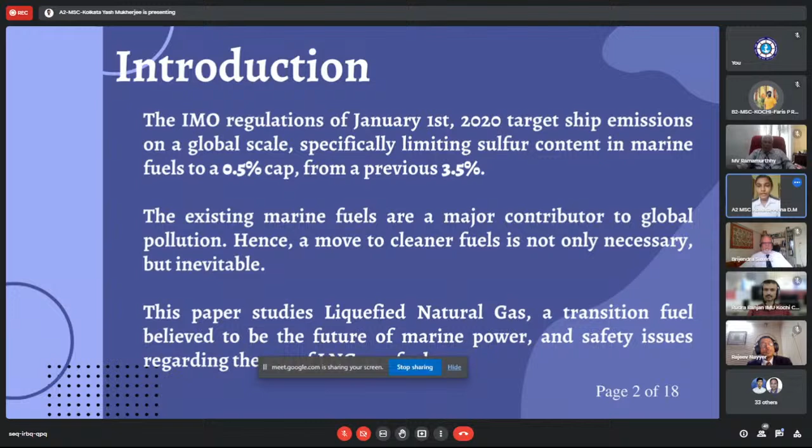Heavy fuel oil has been the main fuel used in the maritime industry for a really long time, as it is the most affordable and accessible fuel. With the rising demand for LNG, we must consider the safety concerns it presents. Our paper looks into these problems and offers suggestions to improve LNG fuel safety.

Our research was conducted mainly based on 3 steps: First, can we really replace HFO with LNG, and if so, why LNG and not any other alternative fuel? Second, if we can replace it with LNG, what can be the safety concerns of doing so? And third, how can we tackle these issues, and how practical are those solutions?

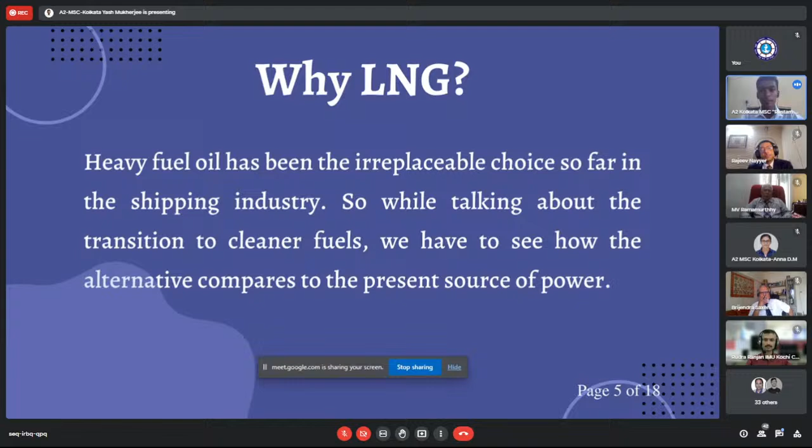Now I request Cadet Rustam Raj to take on the presentation from me. So, why LNG? As we know, after the restrictions on sulfur emissions, mainly in sulfur-controlled areas, HFO is mainly facing many setbacks. As my colleague has already discussed, LNG decreases the emissions of SO2 up to a great extent.

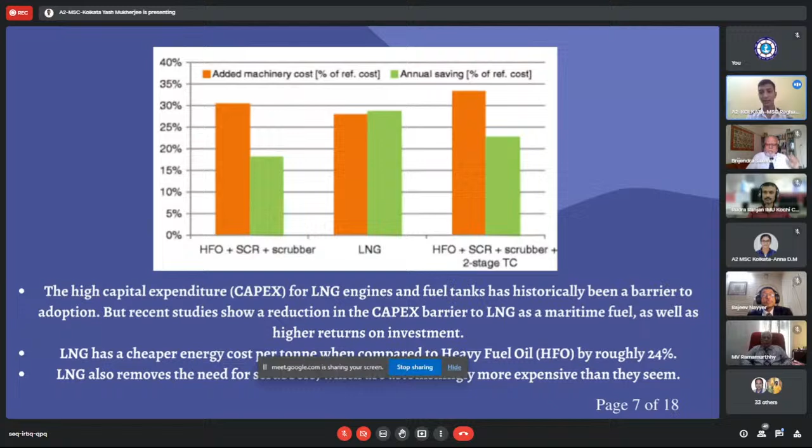Now coming to the cost, LNG as a fuel used to be very expensive long ago, but with newfound sources of LNG worldwide, LNG prices have dropped significantly, whereas HFO prices have risen due to increased use of fossil fuel and lower availability. It is meant to sustain for a long time, but that's not that long. Also, LNG has a cheaper cost per ton compared to HFO. We need less fuel to produce more energy, which ultimately cuts down costs.

So what are the safety concerns regarding use of LNG as a marine fuel? As you know, all good things come with a catch. The first is an inexperienced crew. As it is a relatively newer technology, not many crew are familiar with handling LNG, and it is a very volatile fuel, so you have to handle it properly.

The second is embrittlement due to the gas, which corrodes the metal it is stored in. The third is cold vapor release. In case of an LNG leak, vapors are released and these vapors can explode, which is a huge concern for life and property. And the fourth is leaks during LNG bunkering.

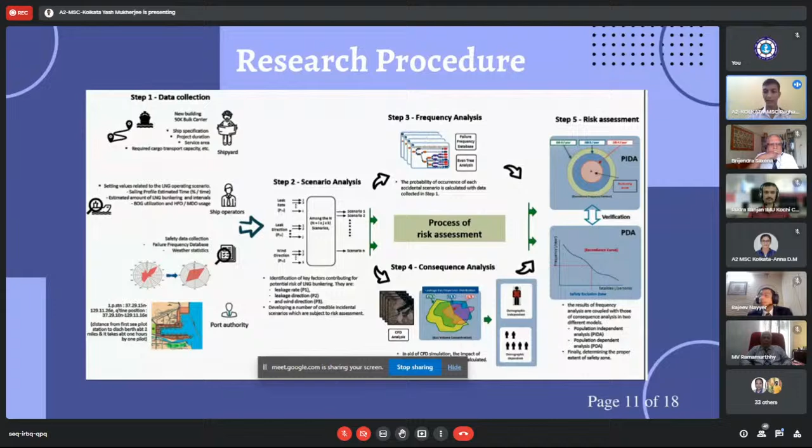The second was scenario analysis. Now we know the contributors which contribute to the accident, which is the leak size, the leak direction, and wind direction. So we combine those to form different scenarios in which accidents can take place.

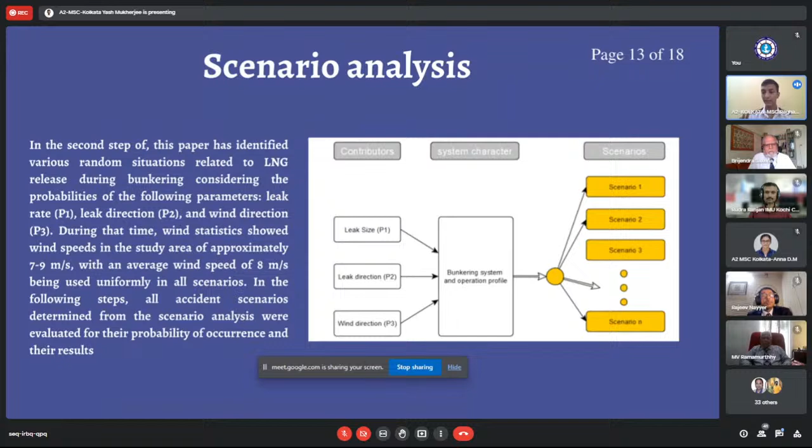The third is frequency analysis. An accident has happened, but how often does it happen? That's how big of a threat it is. So the first is leak hole. We combine three various factors to produce the number of scenarios: first is leak holes, then we combine it with leak direction, and third with wind direction, because the wind direction will determine whether it will go towards the sea or towards the population or equipment, whatever that is.

The next part, which is the most critical part of our paper, is the impact analysis. As you can see the equation on the screen, we use this equation to assess what is the impact of a leak on property and life. Now, the IGF code, which is the International Code of Safety for Ships Using Gases, is implemented by many flag states, but it does not have any specific safety requirements for a safety zone, so we can reduce, minimize, or even eliminate the risk on life.

With this in mind, there are still drawbacks based on the fact that there are different levels of safety requirements set, and not all of them are optimal and ideal. So in this paper, we use two criteria to assess the risks. The first is half LFL, equivalent to 2.5% of airborne gas concentration by volume. The second one is a little extreme, but we have to put in the extreme scenarios: full LFL, equivalent to 5% of airborne gas concentration by volume.

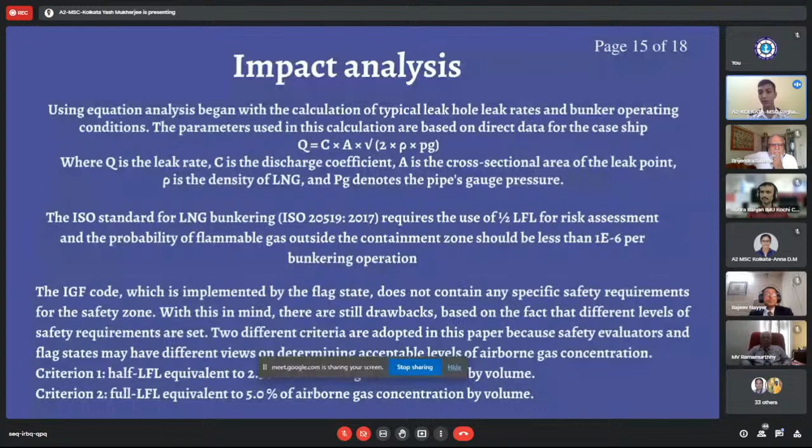The last part of our study was focused on risk assessment. We have all the data, we have combined everything, now we know what are the risks associated with an LNG bunkering accident. It was done in two parts. First was PIDA, population independent analysis: there are no people around, an accident happens, let's see how much damage it creates and what can be put into place to stop that. The second was PDA, population dependent analysis, because PIDA has some pitfalls in determining the appropriate level of safety zones, so we have to put in some people and see how it performs.

So what did we observe? We observed from all our study combined that appropriate levels of safe zones can be set at 28.8 meters, which can greatly reduce the amount of damage to property, as well as focusing mainly on people. Property can come back, people can't. So at the risk of one fatal incident in 10,000 years, a safe zone at 28.8 meters can be set. Whereas at 46.6 meters and 213 meters, the areas are within 5% and higher gas concentration, regarded as the critical zone.

The second part is, in case of critical area considered to be within 2.5% and higher gas concentration in air, the safety zone will expand to 34.9 meters because the gas spreads.

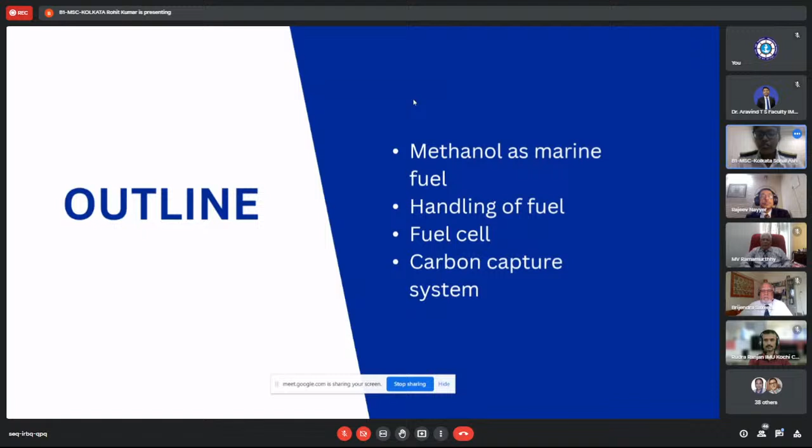Going on to methanol as marine fuel, methanol has emissions that are on par with LNG, but it is far less expensive to modify engines for, and has access to infrastructure because it is currently being used on ships and is supplied by almost 100 ports worldwide. Overall, it is practical in every way and offers a viable alternative fuel at this difficult time in the economy.

When we are talking about the advantages, methanol burns cleanly and releases less smog-causing pollutants and particulate matter when compared to conventional fuels. It can help ships meet eco-friendly fuel standards, improve the quality of the air, and solve related issues with human health.

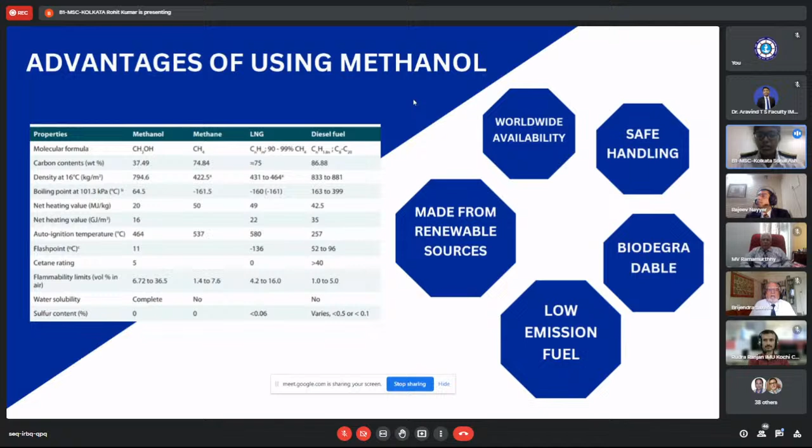When talking about the worldwide availability of methanol, it is one of the top 5 chemical compounds shipped over the world each year. With very minor improvements to terminal infrastructure, it may already be utilized for bunkering worldwide, unlike other alternative fuels. Moreover, methanol has a remarkable history of safe handling, and it is biodegradable.

Handling of fuel: the following instructions must be written on the label of the fuel sample - the receiving vessel's IMO number and name, the bunkering port, sampling technique used, fuel oil quality, and the owner's name and signature. Problems involving adulteration of fuel to increase volume during transportation may be resolved this way.

Although it might be challenging to track the supply chain at each stage, the quality of the fuel can be monitored on a frequent basis as it is moved from one location to another. The majority of issues with the fuel flash point may be addressed by inert gas systems, SOLAS rules, and IMO-approved safety regulations. When debunkering is concerned, it is basically based on the restrictions imposed by states.

Moving on to the next slide of methanol bunkering: as methanol contains no sulfur at all, this whole problem is completely avoided. The toxicity of methanol, along with its low flash point of 11 degrees Celsius, necessitates special management during storage, handling, and usage, in addition to material compatibility concerns. A methanol marine fuel grade definition is currently being developed by ISO, however it is not yet accessible.

Fuel bunkering stations: following are the precautions needed to be taken for fuel bunkering stations. Sufficient ventilation should be provided to the bunkering station. It should be separated from other areas of the ship by a gas-tight bulkhead, and control of bunkering should be done from a safe location where tank level can be monitored.

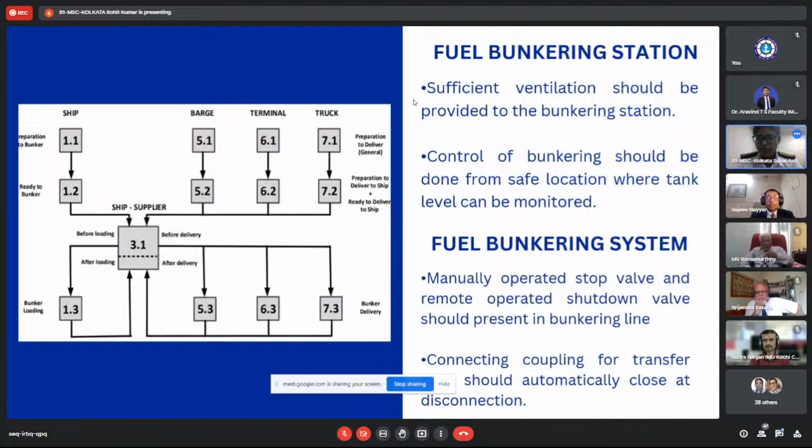When we go to the benefits of using fuel cells: the following benefits can be obtained by using a methanol reformer system with a high temperature polymer electrolyte membrane fuel cell and a carbon dioxide collection and liquefaction system to produce electricity. Compared to direct methanol fuel cells, it is more efficient and long lasting, and it can run on fuel of low purity, which reduces its cost.

As a result of operating at high temperatures, numerous steps of the fuel processing are eliminated. The system includes a methanol steam reformer to produce reformate gas, a combustor to heat the reformer, an HTPEMFC stack to produce electricity, a CO2 capture unit, and a liquefaction system. Steam reforming is preferred because it can provide low carbon monoxide ratios, lower temperature reaction in the reformer, and a larger molar flow rate of hydrogen.

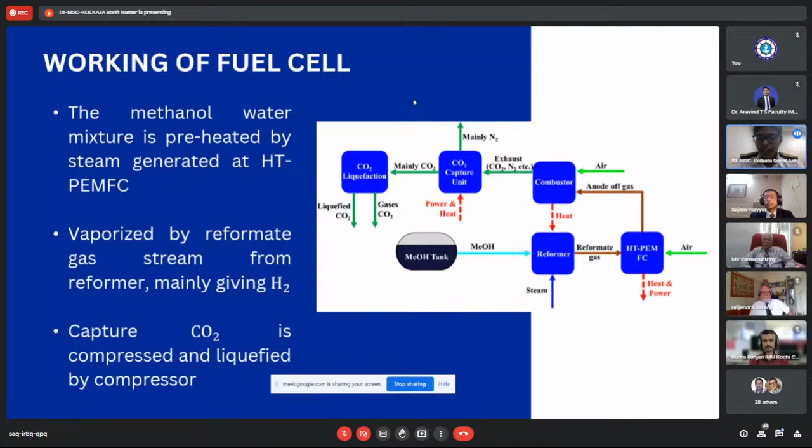The steam produced at the HTPEMFC preheats the methanol-water combination, which is then evaporated by the reformate gas stream from the reformer, mostly producing hydrogen. The reformate gas is then utilized to generate electricity in the HTPEMFC, and off-gas from the fuel cell is sent to the combustion chamber to generate heat, along with compressing and liquefying the captured carbon dioxide. There are several precautions while using the same.

According to a study published in the International Journal of Hydrogen Energy, the gradient in water concentration between the anode and cathode has a significant role to play in water transport over the PBI membrane. As a result, cathode air humidification lowers the whole cell's ohmic resistance.

Due to the large platinum content employed in these cells, recycling is required. In the future, platinum-free electrodes may be utilized as an alternative.

Going to the next slide of carbon capture, energy converter, different carbon capture methods have been developed. However, there are still a lot of technical and economical challenges. Energy converters that produce power electrochemically include fuel cells. So today, several fuel cell designs are seen as an effective approach to capture and transform carbon dioxide.

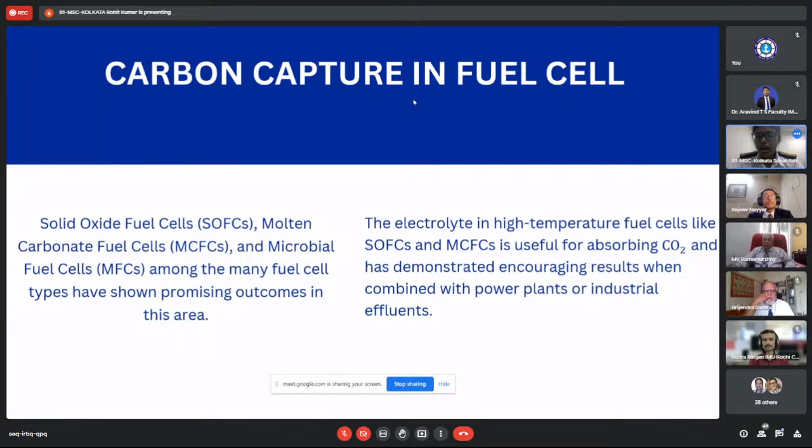Among the many different forms of fuel cell, microbial, solid oxide, and molten carbonate fuel cells have all demonstrated promising results in this field. When paired with power, the electrolyte in high temperature fuel cells like SOFCs and MCFCs is effective for absorbing carbon dioxide and has shown positive results.

Coming to the conclusion, the challenges raised in the paper are intended to enhance fuel quality in the maritime industry. It also draws attention to related safety concerns and potential solutions that, if implemented, can reduce greenhouse gas emissions, ensure the crew's safety while on board, increase operational cost effectiveness, open pathways for future fuels, and increase fuel cell utilization.

The organization is urged to consider the aforementioned advantages as well as the safety issues surrounding methanol as a fuel and related safety measures when creating the updated standards in the methanol chapter of the IGF code. Thank you.

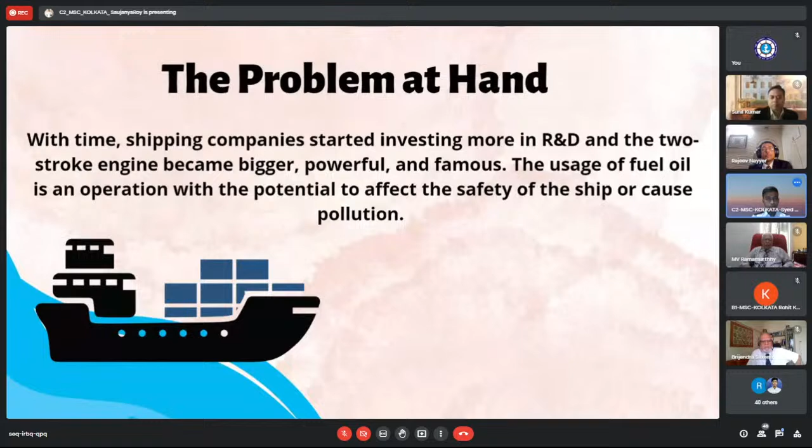Now let us understand what the problems are. Safety of the ships is compromised when tanks overflow as they start to fill up too much. The oil is discharged from the tank air vent and flows into a containment box, which then spills out on the deck. If the oil accumulates on the deck, it may overflow unless the guttering is raised at the deck edge. This is when the real trouble starts.

Oil flows down the ship's side and onto the water surface, which can then be distributed widely by river or sea currents, going onto port structures or other shore features and amenities.

The other problem is the temperature. Petroleum products usually have a high thermal expansion rate, which must be taken into account when several thousands of tons are transferred or purchased. The barge will often try to under-declare the temperature during the opening gauge and over-declare during the closing. This is why the sounding of barge tanks is necessary to make sure that the correct sounding or ullage tables are used. Let us now understand the cappuccino effect and how it compromises safety during the bunkering of fuel oil.

It may be described as a frothing, bubbling effect caused by compressed air blown through the delivery hose. The aerated bunkers, when sounded, will give the impression that the fuel is delivered as ordered. In fact, after some time, when the entrapped air in suspension settles out of the fuel oil, the oil level drops and perhaps compromises the journey calculations. In large bunker deliveries, this could result in considerable, huge financial losses.

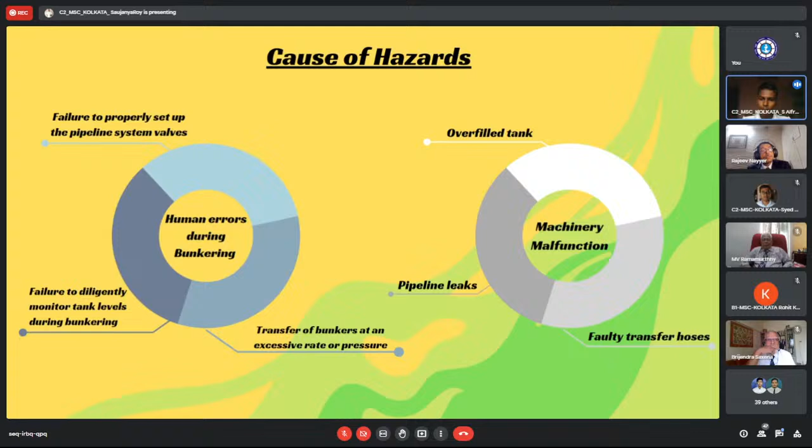The machinery malfunction hazards include airlock, where air becomes trapped in the tank due to excessive pumping rate, trim, or list, causing a sudden unexpected discharge of mist or oil from the tank ventilator. Also, malfunctioning of valves associated with deficient valve testing or maintenance are the root causes of all types of danger related to bunkering and fuel oil usage.

The delegates of C2 propose the following solutions. First is the use of alternative fuel.

But first let us understand why HFO is on the decline. Diesel fuel contains sulfur, which derives from the original crude oil source and can still be present after refining. After combustion, sulfur from diesel fuel creates sulfuric acid that causes corrosive wear on the metal surfaces of an engine. The sulfur in fuel forms particulates that are a primary contributor to air pollution, and thus IMO implemented regulations regarding the sulfur cap.

Commonly termed as the Sulfur 2020 rule, it lowered the previously allowed limit of 3.5% to 0.5% mass by mass for sulfur in fuel used on ships operating outside the designated emission control areas. This alteration led to modification of Annex 6 of the International Convention for Prevention of Pollution from Ships, that is, MARPOL, making this new limit obligatory.

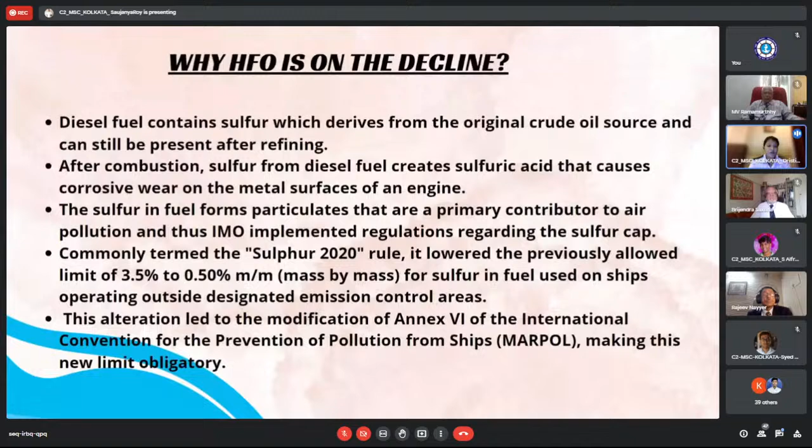An important step was taken to reinforce air quality, guard the environment, and safeguard human health when a brand new limit on the amount of sulfur in fuel used on ships went into effect on 1st January 2020 by the IMO. While numerous alternative fuels with lower or zero carbon emissions could help achieve the IMO's 2030 and 2050 gas reduction targets, many of those replacements still require extensive development to satisfy industry requirements.

While laying the groundwork for lower or carbon neutral fuels produced from renewable or zero carbon energy, at a time when the entire world is under substantial pressure to require action to scale back GHG and other emissions to air, our paper asserts that LNG may be a solution that may help the industry advance. The study evaluated the operational and commercial viability of six alternative fuels, including hydrogen, ammonia, methanol, LPG, biofuel in the type of hydrotreated vegetable oil, and fuel cell electric systems.

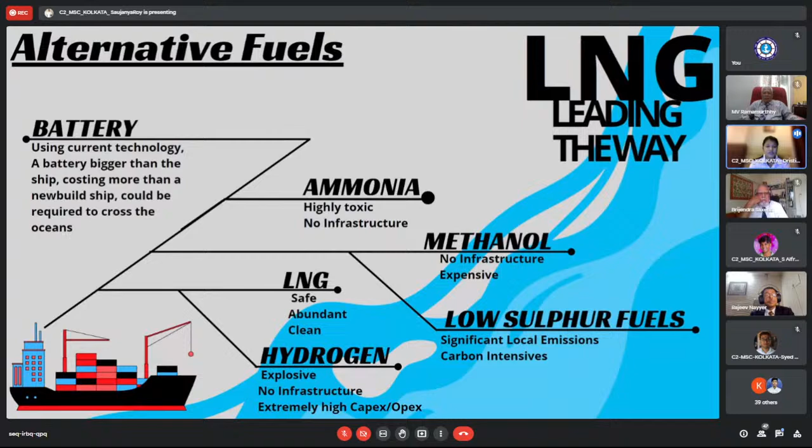The root cause of most hazards in the usage of fuel oil lies in unsafe bunkering. As a remedy, STCW course should be implemented at the basic level of training course. Practical tasks assigned will help in the following ways: properly set up pipeline system valves, diligently monitor tank levels during bunkering, and avoid transfer of bunkers at an excessive rate or pressure.

A representative sample would be obtained by a permanent sampling probe fitted close to the bunkering manifold. Onboard testing of the fuel could be carried out during the bunkering operation by one of the engineers not required to supervise or monitor the bunkering operation. The following tests could be carried out: water content, viscosity, density, compatibility, and a check for abrasive fines. Although the tests are not as accurate as a shore-based lab, the test would indicate whether the fuel loaded is the same as the fuel quality ordered, and therefore the bunker received.

We believe, as delegates of C2, there is a need for collaboration between MSC and MEPC. The Maritime Safety Committee deals with all matters associated with maritime safety and maritime security, which fall within the scope of the International Maritime Organization, covering both passenger ships and cargo ships. The MEPC addresses environmental issues under IMO's remit, including the control and prevention of pollution from ships covered by the MARPOL Convention, and also oil and chemicals carried in bulk, sewage, garbage, and emissions from ships, including air pollutants and greenhouse emissions. Equally important is changing norms and expectations within the sector and cooperation between ship owners and operators and maritime authorities. To ensure compliance with maritime regulations requires continuous monitoring and collaboration between MEPC and MSC.

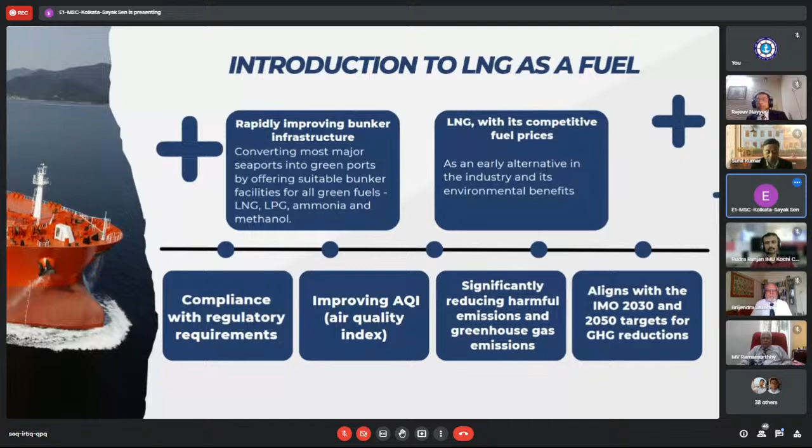LNG-powered vessels have the potential to reduce the carbon intensity indicator and energy efficiency design index by 20%, along with reductions in GHG emissions by 23%, NOx by 80%, and sulfur oxides. However, to safely extract the benefits of this alternative fuel, proper quantitative risk assessment and hazard identification is necessary.

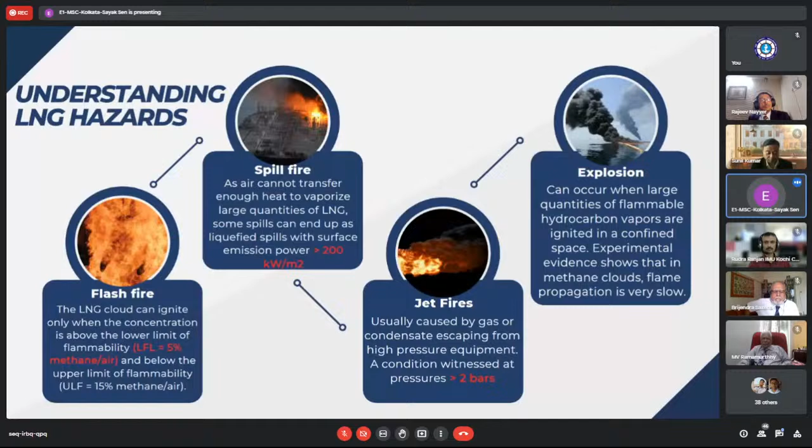Before coming to the safe handling procedures of this alternative, it's important to know the different kinds of hazards LNG can pose under various conditions, which include flash fire, spill fire, jet fire, explosions, asphyxiation, brittle fracture, cryogenic burns, and so on.

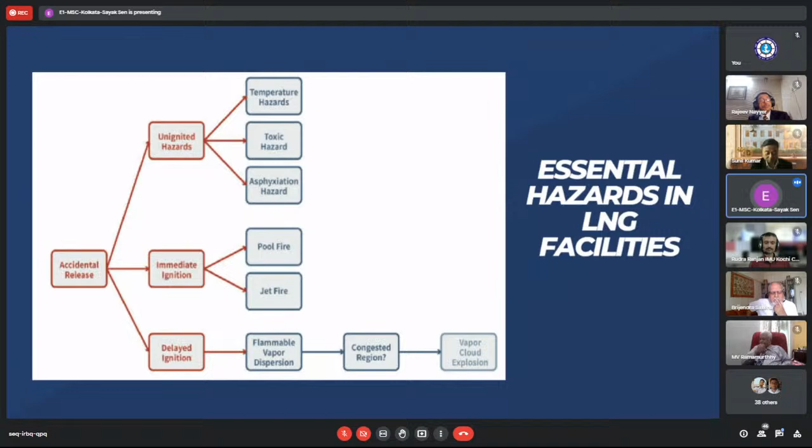A risk criteria framework deals with the risks and measures to mitigate them based on factors like probability, severity, and the costs and benefits involved in the risk reduction.

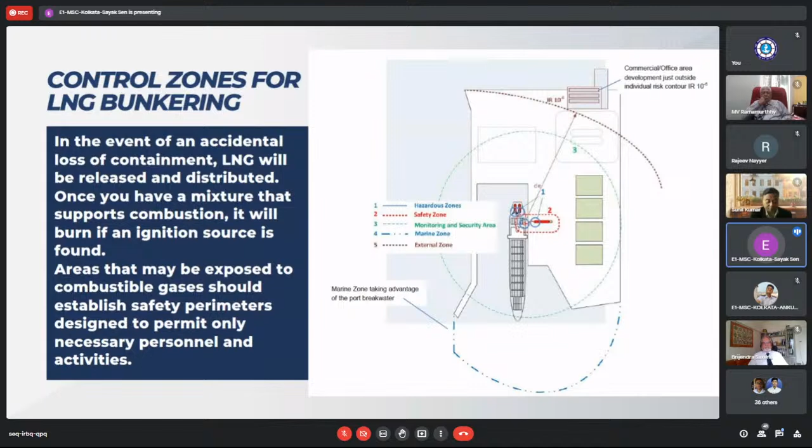Another important aspect of safe handling of LNG involves determining control zones during operations like bunkering. In order to prevent accidental release or formation of combustible mixture, safety perimeters should be determined to permit only necessary personnel and activity. Based on proper evaluation, the perimeter can be classified into hazardous zones, safety zone, monitoring and security area, marine traffic exclusion zone, and finally, the external zone.

And a proper definition of control zones calls for a proper evaluation method, listed as follows. This may include a proper sequence of action involving calculating, planning, sharing, approving, implementation, and control.

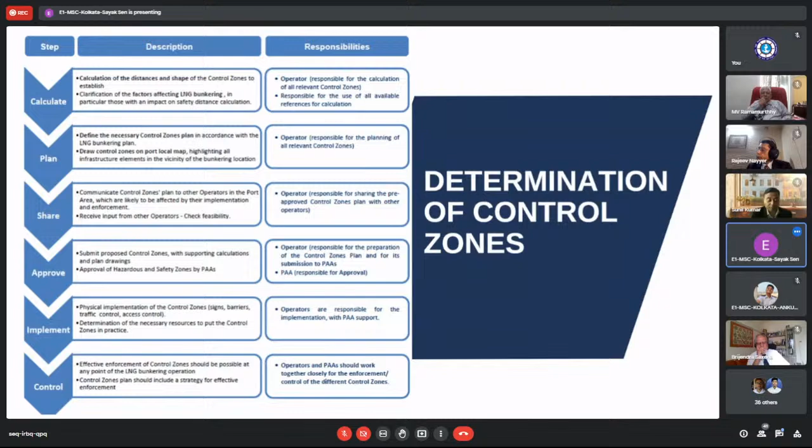Another aspect of safe handling of LNG deals with simultaneous operations that occur in parallel with bunker operations, leading to increased risks. These may include, but are not limited to, loading and unloading of cargo, lifting or maintenance work, passenger embarking and disembarking.

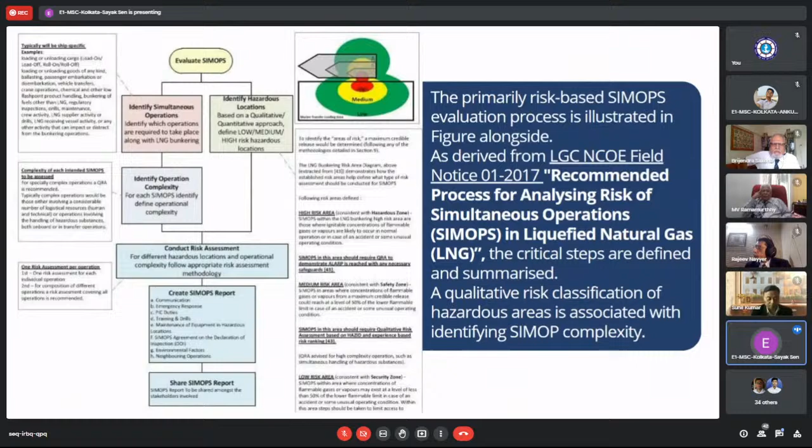Our final aspect of LNG's safe handling deals with methane slip. LNG comprises 85 to 95% methane, which has a global warming potential 80 times more than that of carbon dioxide. This calls for proper countermeasures to ensure minimal escape of unburnt methane into the atmosphere from two-stroke and four-stroke engines. Causes of methane slip include crevices or pockets in the combustion chamber, lean running conditions responsible for incomplete combustion, and leakage through piston rings.

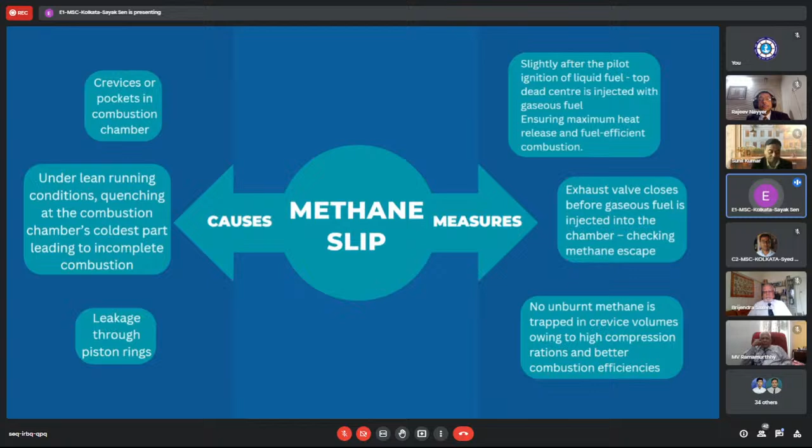Some of the measures undertaken by MAN B&W for its two-stroke dual fuel engines include injection of gaseous fuel when the piston is at TDC, slightly after liquid fuel injection, which ensures efficient combustion; closing of the exhaust valve before gaseous fuel injection, hence checking methane escape; and ensuring no unburnt methane is trapped by maintaining high compression ratios.

Finally, concluding, the paper has emphasized the use of liquefied natural gas as an efficient alternative, complying with regulations and good for the environment, while keeping in mind its various hazards and carrying out comprehensive risk assessments, proper crew training, and incident reporting to reap its benefits as a marine fuel.

The Indian Maritime University is a professional university intended to fulfill the requirements of the maritime sector. Its primary advantage is the ability to establish and develop a critical mass of activities, distributed across different locations in the country with comparative advantages, to facilitate the best possible education and training in a given area of specialization. The structure and content of programs for personnel at different qualification levels can be uniquely addressed by IMU, unconstrained by the limitations of general-purpose universities.

The upgradation of courses, revision of syllabi, introduction of new courses, and adoption of new technology-enabled learning methods, including regular classroom instruction, virtual classes, and distance learning, will be facilitated by the university system. Regulations governing programs can be customized to meet the particular needs of industry and international organizations. Similarly, the university can develop its own transparent admission policy to cater to the profiles of beneficiaries serving the maritime industry.

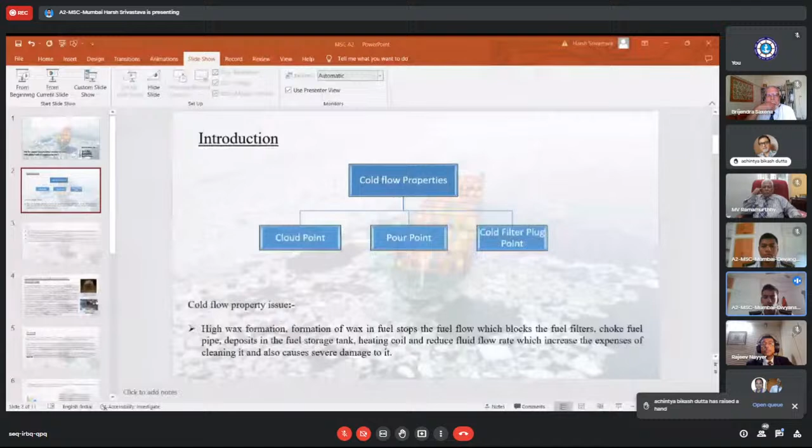VLSFO is a residual fuel oil produced by blending residual fuel oil with distillate fuel oil until it reaches the requirement of ISO 8217-2017. It has a high concentration of paraffin, as paraffin is more refined and a clean fuel oil.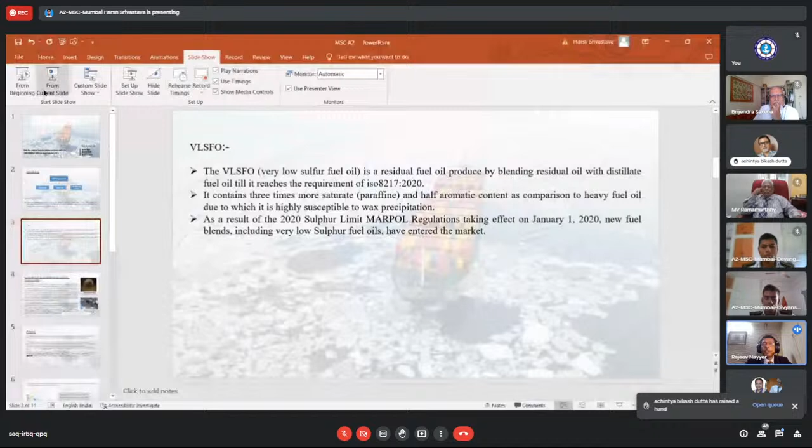Sorry Divyansh, just hold on, I think one of the judges has an issue. Mr. Datta, yes please. I just want to request the presenter to open the slide in slide mode because it is not showing - it's showing very small fonts. Sorry sir, yes, thank you, I'll do that.

Go to the right corner down and put that slide icon on. I think there is a net issue, that's why I'm not able to put that in. Okay fine, sorry, one second sir. You can try putting off your video if you are having connectivity issues. I think if you're not able to resolve it, then continue like it is. Just a second sir, just a second.

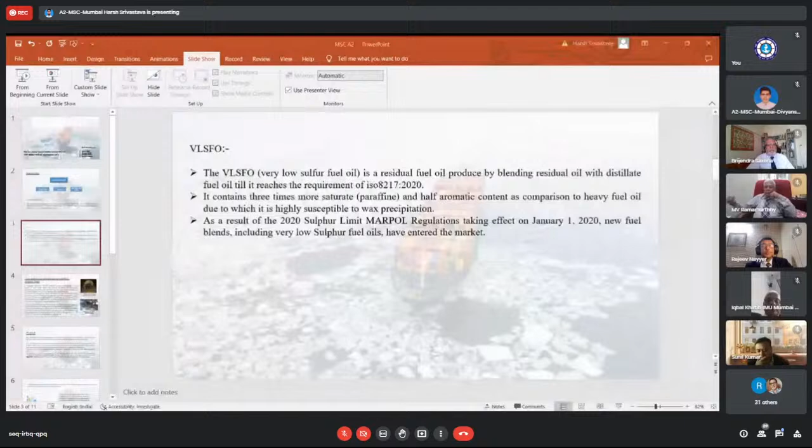Sir, I think it is not. I'm not able to. Okay, go ahead. Go ahead.

Yes sir, so I was talking about the VLSFO. VLSFO is a residual fuel oil produced by blending residual fuel oil with distillate fuel oil till it reaches the requirement of ISO. It has a high concentration of paraffin, as paraffin is a more refined and clean fuel, which ensures it produces less soot and the SO2 emission problem is also low.

But there are some problems also associated with it, like higher wax problem, which chokes and damages the engine. So I would like to discuss the case study related to our topic, cold flow property issue. This we have taken from the incident report of the latter vessel.

As you can see, this vessel MV Mineral Temse bunkered a grade of fuel oil RMG 380. The date you can see from the slide. Sample report of the bunker was also found with no anomalies.

But as they started using this new bunker, their sludge discharge line of the oil separator got clogged frequently, generating the separator fail alarm. One day, the engineer on duty received a separator N1 fail and fuel oil bowl leak alarm on the computer.

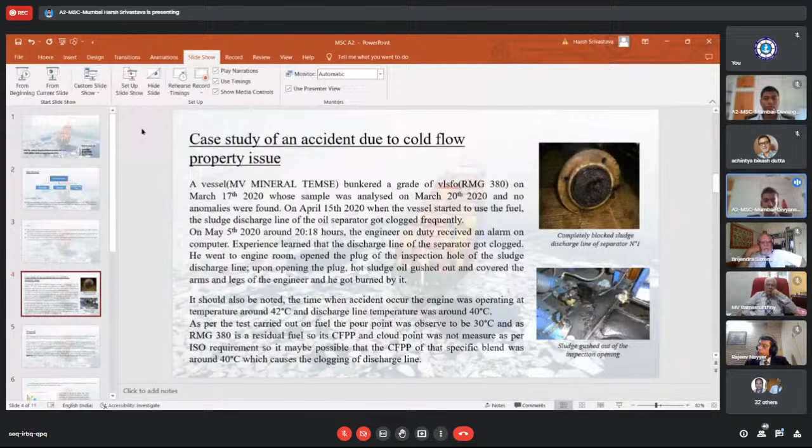When this fuel separated at plus minus 40 degrees Celsius, the inspection plug was also opened very quickly by the person, that is the oiler. So that was also one of the reasons.

But apart from that, the cold flow property was also one of the reasons as per the official incident report of this vessel. It should be noted that at the time the accident occurred, the engine was operating at a temperature around 42 degrees Celsius, and the discharge line temperature was around 40 degrees Celsius.

As per the test carried out on the fuel, the pour point was observed to be 30 degrees Celsius, and as RMG 380 is a residual fuel oil, its CFPP and cloud point was not measured as per the ISO requirement.

So it is possible that the CFPP of that specific blend was around 40 degrees Celsius, which caused clogging of the discharge line. Apart from this reason, there was also fault from the engineer's side, as he was not wearing overalls at the time of the accident.

After this slide, I would like to call my friend Devang to take the further chart. So Devang - yes sir, I will carry now further the proposal.

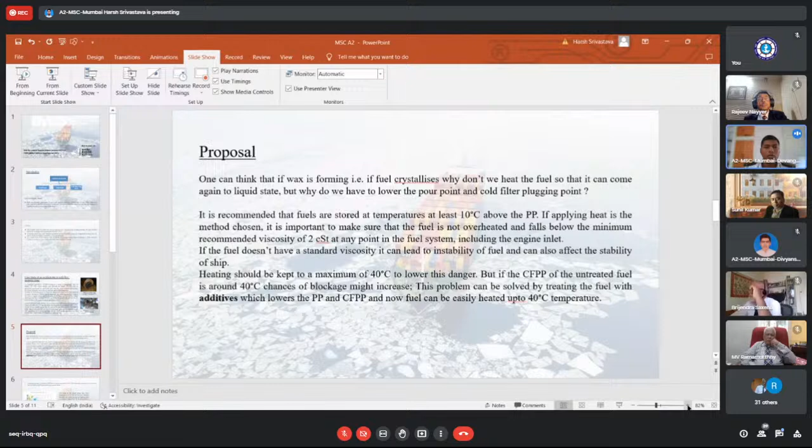In this, temperature management also plays an important role in cold flow properties. It is recommended that fuels are stored at a temperature 10 degrees more than the pour point of the vessel. But heating should also be kept to a maximum of 40 degrees Celsius, because above that, fuel viscosity starts to give a problem.

As we propose in our paper, about adding additive to reduce the pour point and cold filter plugging point - because if a grade has a pour point of 30 degrees Celsius and CFPP near 40 degrees Celsius, chances might be there of clogging despite the fuel temperature being 10 degrees more than pour point. By adding the additive, we reduce the pour point and CFPP so that around 40 degrees Celsius, no issues will arise.

So basically, as described by my teammate, the cold filter plugging point and pour point are basically the minimum temperatures which tell us the limitation of a fuel. So to treat the cold flow properties of this fuel, we can add an effective additive so that the temperature of the pour point and CFPP reduces, and the ship can even travel in a cold climate. So effective additives can help to reduce the temperature.

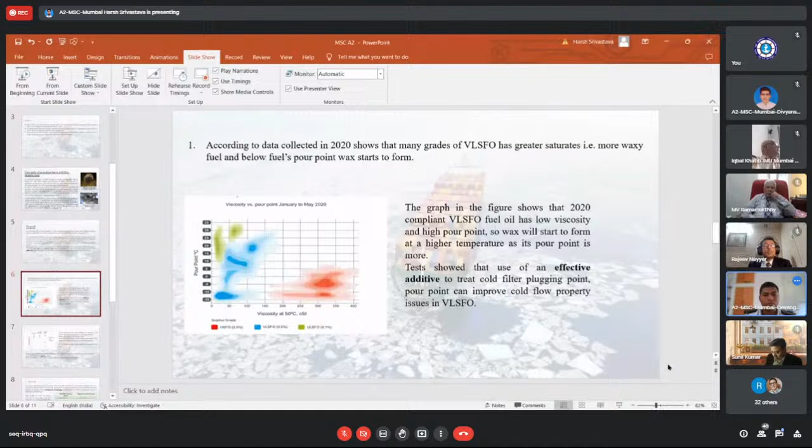This means when we are trying to solve the issue of pour point by adding an additive for pour point, the CFPP does not get that much help. But when we try to resolve the problem for CFPP and improve it, then pour point also gets improved. This is basically a positive result. The formation of wax will start at a lower temperature than before, and ships will be able to navigate through colder regions also.

Now I come to my next point, that is PRI-FLOW. PRI-FLOW is nothing but a super concentrated anti-gel treatment which makes the fuel flow in cold weather conditions also. It basically reduces the temperature at which crystallization occurs and fuel filters get plugged. By treating the CFPP, it changes the morphology of the wax, making it into finer particles so it can easily pass out from the fuel filters. So this is an advantage of using PRI-FLOW.

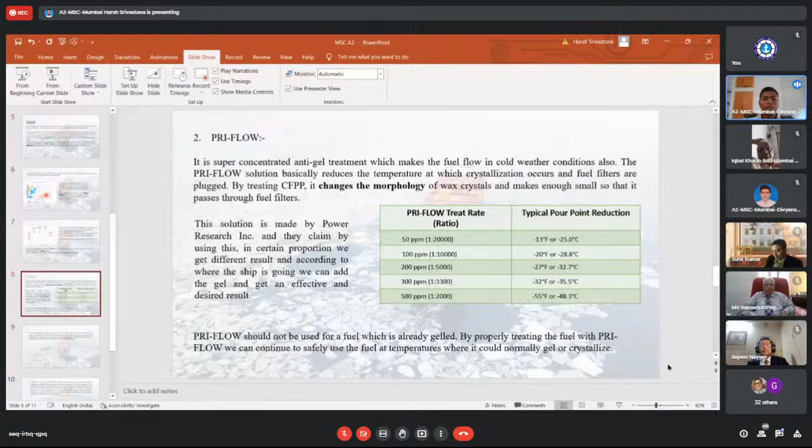Now, whenever a vessel takes a new bunker, it has some requirements as per ISO, like viscosity, density, etc. Cold flow property is one of the requirements, but for residual fuel, only pour point needs to be checked. But we believe CFPP of the fuel should also be considered and added in the treatment of fuel standards for marine residual fuel.

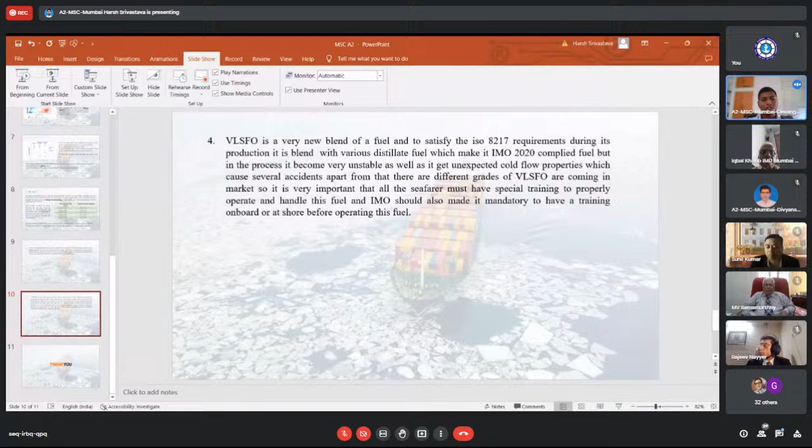Now I would like to end my presentation with this last proposal. As we know, VLSFO is a new type of fuel, made by mixing and blending to comply with the IMO 2020 sulfur emission limitation. But this process has started to have different issues like cold flow properties. So we propose that all seafarers must have special training to properly handle this fuel, as it is new, and we are trying to add some new points and make it more advantageous for ourselves. Therefore, we are trying to have some more special training to properly handle this fuel. Thank you, sir.

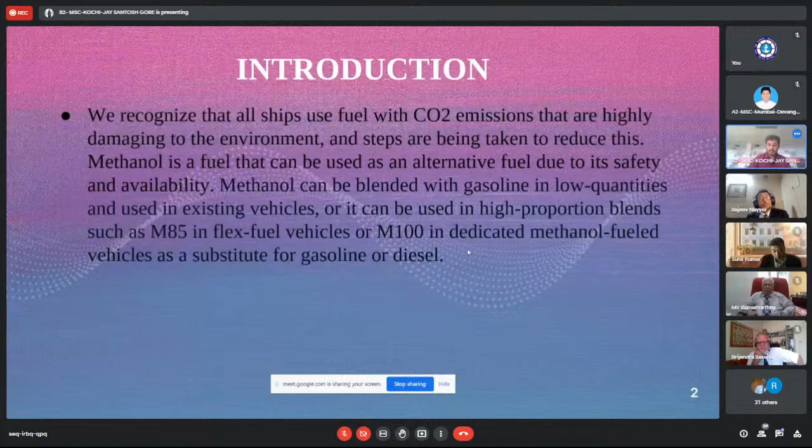The main benefits of methanol: it is a low emission fuel, economical, available worldwide, has a long history of safe handling, is biodegradable, and is made from various sources including renewables.

There are very few disadvantages of methanol: formaldehyde emissions are higher, and the cost of methanol is also a bit higher than premium gasoline.

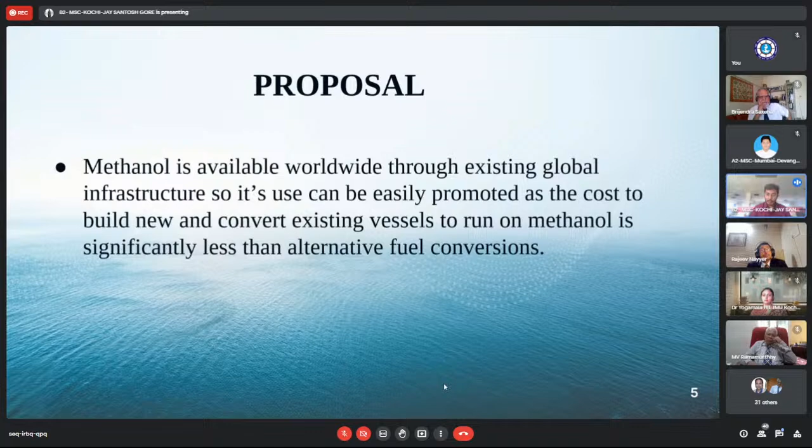Our proposal to you: methanol is available worldwide through existing global infrastructure, so its use can be easily promoted, as the cost to build new or convert existing vessels to run on methanol is significantly less than alternative fuel conversions. Our second proposal is that from an environmental point of view, methanol performs well.

Methanol readily dissolves in water and is biodegraded rapidly, as most microorganisms have the ability to oxidize methanol. In practice, this means the environmental effects of a large spill would be much lower than an equivalent oil spill. Methanol bunkering is a safe and realistic option as a clean burning fuel with a sustainable pathway.

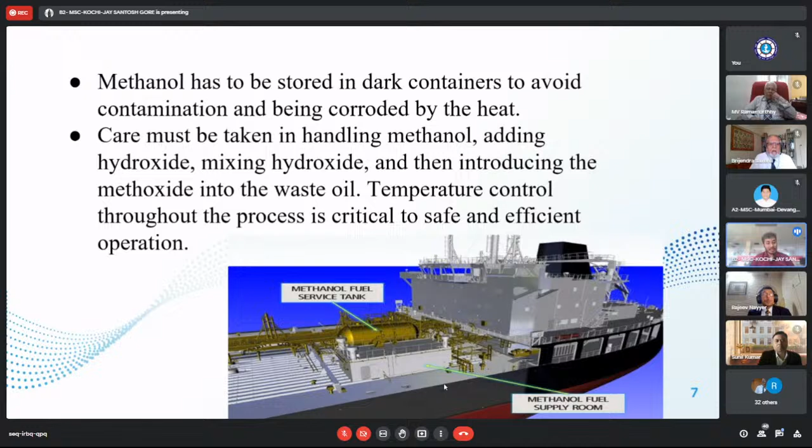Our action to the committee: as per the proposal, it is clear that methanol is one of the newest fuels in the shipping industry and there are no guidelines for its use. Therefore, the committee is requested to introduce guidelines on the use of methanol, and storage and transport of methanol should be regulated through more bunker facilities. Thank you so much.

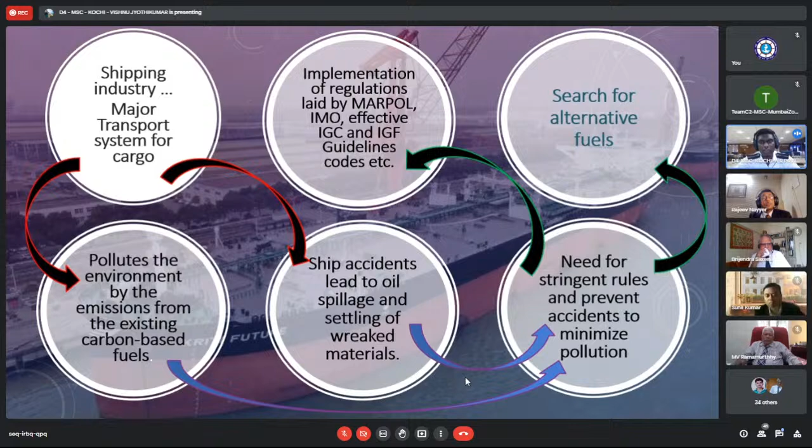The IMO has put a pathway to 0% carbon emission before 2050. In order to achieve that at the earliest, we are stepping into ammonia as fuel for the ships. But there are some disadvantages in using ammonia as fuel, like the cost and toxic effect on human health, but that has to be managed. There are 3 main challenges in using ammonia as fuel for ships: their flammability, their productivity, and the corrosivity.

Ammonia can be burned in IC engines, like using compression ignition with pilot fuel, spark, or spark plug, since it has a higher auto-ignition temperature, high heat of vaporization, and a narrow flammability range. Since ammonia is used as a fertilizer, its availability as a fuel is a question. The global production of ammonia in the year 2020 was 187 million tons.

And finally, the corrosivity. It is a major concern for ammonia as fuel. Corrosion occurs when the liquid ammonia that contains impurities or contaminants is brought into contact with mild steel.

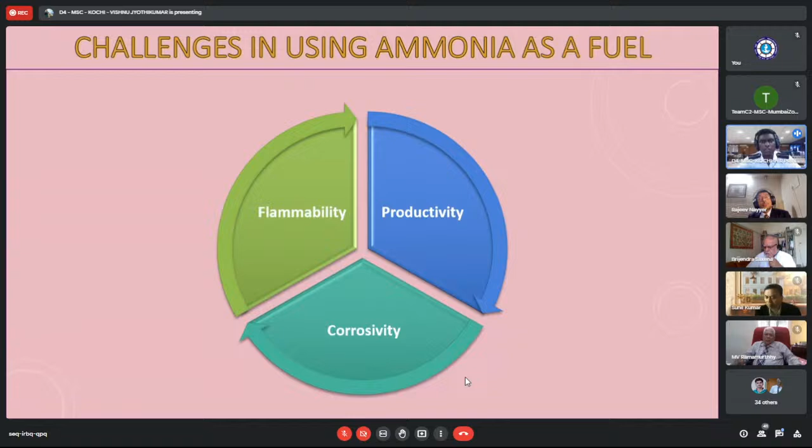Then comes the synthesis of green ammonia. Using renewable energy like solar power or wind energy, water can be taken using high-powered pumps and separated into hydrogen and oxygen. And the air can be separated into nitrogen and oxygen, and these are fed into Haber's process, where the hydrogen and nitrogen react under high temperature and pressure to produce ammonia.

Scaling up of ammonia production can be achieved by revamping the existing conventional ammonia producing units into hybrid units, and by establishing new plants. A productive possible solution would be to revamp the existing plants into hybrid plants by introducing the electrolyzer, gradually adding more.

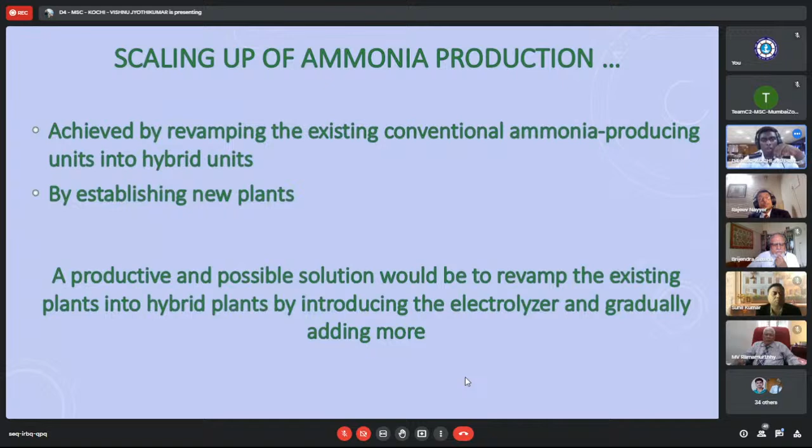When using ammonia as a fuel, the existing production and storage terminals at ports worldwide give ammonia an edge, making ship-to-ship and shore-to-ship bunkering infrastructure easier to develop. Also, there is a radical shift toward the use of ammonia as a fuel that would help in reducing the CO2 footprint and sulfur emission.

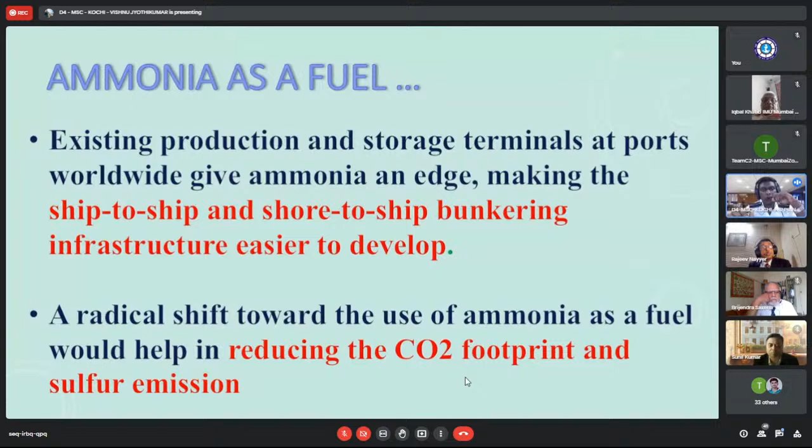The existing knowledge gap in the use of ammonia fuel vessels can be minimized by performing an in-depth assessment of ammonia as a fuel with reference to technical, economic feasibility, and environmental performance compared to other fuels, and also carrying out feasibility studies pertaining to bunkering, safety routines, etc. Also, future seafarers can produce a prototype engine that can run on ammonia efficiently.

Moreover, there are some key concerns for using ammonia as fuel, and they are the future cost of green ammonia, the safety risk assessment, and the global availability and scalability. Already 120 ports are readily equipped with ammonia trading facilities worldwide, with additional production planned to meet 30% of marine fuel demand by 2050.

However, there are some environmental benefits too, and they are carbon-free, sulfur-free, and produced entirely by renewable electricity, water, and air. It burns in an IC engine and it is metabolized in the environment.

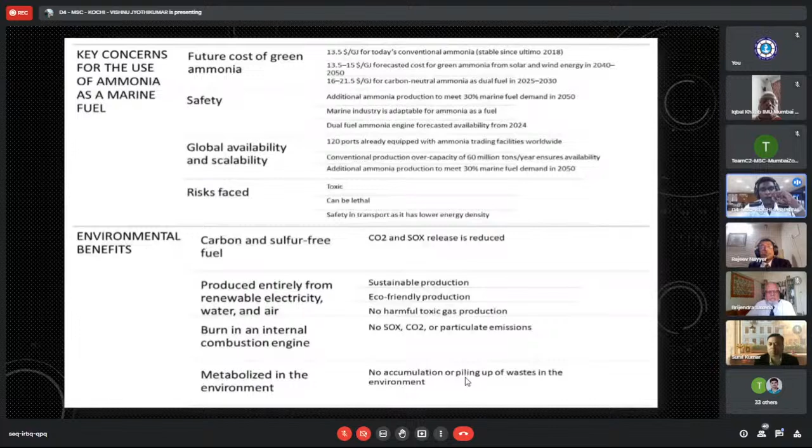The main thing is safety. The safety measures on ammonia as a fuel is we have to make appropriate amendments in the existing IGC code, Chapter 7 and Chapter 16, and also we must make implementations in IGF code as amended in SOLAS Chapter 11.1. The safety of seafarers should be given the highest priority. Awareness of location of safety showers, proper training, and availability of tanker safety guide is a must for all the seafarers on board ship.

Now comes the storage. It should be stored in a cool, well-ventilated location, and there is a need for large tanks. So we'll either use Type C or prismatic tanks.

And next comes the bunkering. Proper mechanical shielding of all leakage points and availability of water for capturing the leaked gas must be necessary when using ammonia for bunkering.

And comes fuel blending. Fuel blending is nothing but mixing of two or more fuels to reduce the emissions to acceptable limits.

There are some ongoing researches for ammonia-powered engines. Wärtsilä is trying to make an ammonia-powered 4-stroke engine, and MAN B&W a 2-stroke green ammonia engine. The industry pilot project ShipFC aims to convert offshore vessels to run on ammonia-powered fuel cells. And NYK is examining the concept of using ammonia as a marine fuel.

So as future seafarers, we recommend using compliant fuels and increasing production of compliant fuels, effective transport of fuel, and bunker stations to clean and purify the fuel before supplying it to ships using heavy fuel oil. We must also encourage research and development for innovative technologies.

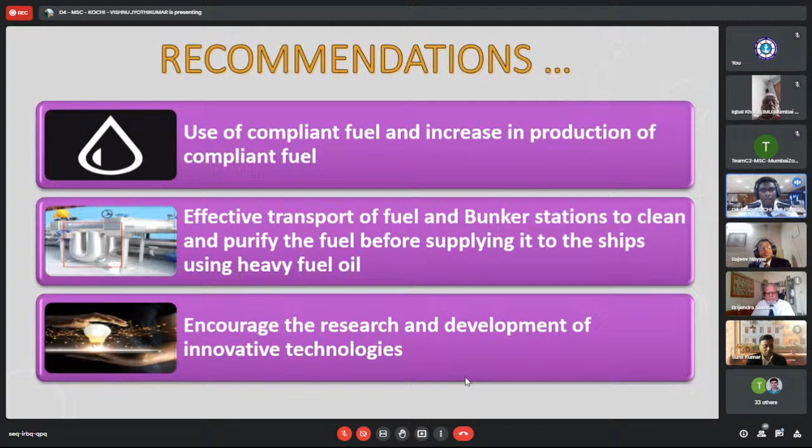As future seafarers, we request the following actions to be taken. We must take actions to enhance the production of alternate fuels by upgrading the infrastructure of their production, promote the production of alternate fuels through adequate funding, and promote infrastructural changes in already existing ships.

Encourage fuel suppliers to develop effective transport systems for transporting alternate fuels from the site of production, establish more bunker stations, and give adequate funding so we can conduct an in-depth study on the efficiency of alternate fuels of different generations. We must also encourage the development of innovative technologies.

Finally, we must analyze the percentage of reduction in the level of emissions and other air pollutants, as well as the health of the environment. So we conclude that ammonia is a promising alternate fuel with 0% carbon emission. Thank you.

Thank you very much, Kochi D4, for bringing about your suggestion that we must get ammonia ready, as you see, ammonia as a fuel. Noted, however, we look forward, considering your advanced approach in ammonia, to getting concrete proposals as to what can be done in IGC and IGF code, which is not there today as far as ammonia is concerned, because there are ammonia vessels on board which fall under these categories, and if there are missing points, we look forward to hearing from you as to what they are.

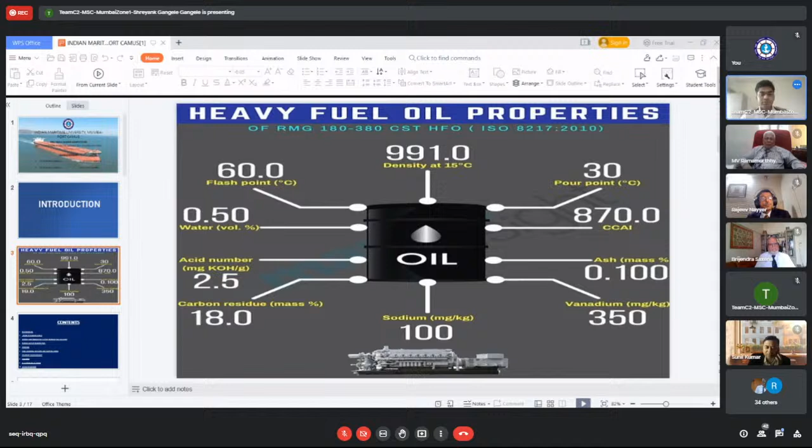We will be covering some of the contents like background prior to bunkering fuels, during and immediately after bunkering fuel delivery, and we will be elaborating on these contents. I will move this presentation to Cadet Shreyank Gangele for further representation.

Hello. We have seen several examples of engine breakdown resulting from catalytic fines sludge that have accumulated in the tank and entered the fuel system during operations.

The international legislation requiring the use of fuel with limited sulfur content has led to a steady increase in the level of catalytic fines found in fuels, which has reduced from 3.5% to now 0.5%. The current global average for low sulfur fuel is more than 30 ppm, and this increases the danger of cat fines settling and accumulating in the bunker and settling tanks.

It appears that the majority of the fuel samples received and analyzed by DNV Petroleum Service in 2013 were tested against the older version ISO 8217 2005 marine fuel specification instead of the latest ISO 8217 2012 specification.

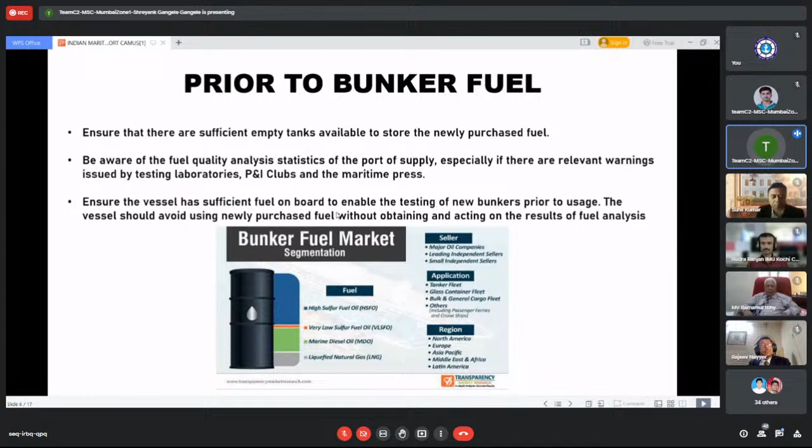Now we look at during and immediately after bunker fuel delivery. Ensure representative bunker samples are drawn in line with industry guidelines and tested by a suitable independent laboratory, preferably against ISO 8217 2012.

Specification requirements dictate that drip fuel samples should be taken from each bunker source, barge, tankers, during bunkering. Expedient dispatch should follow from the bunker port to laboratories for analysis, with the provision that the fuel analysis report is returned to the vessel as soon as possible, prior to use of the bunker fuel.

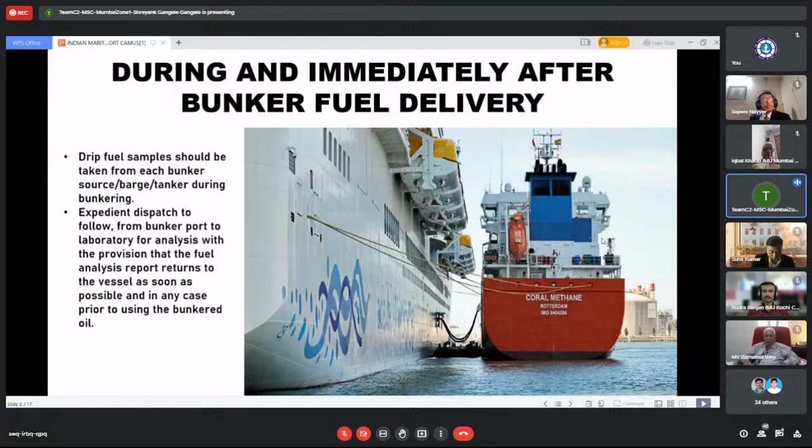During use of bunker fuel, it is recommended that a proper fuel system check be carried out by taking samples throughout the fuel system at intervals of 4 to a maximum of 6 months. However, fuel system check samples should also be taken whenever aluminum silicon is bunkered.

It is recommended that where the engine uses heavy fuel oil, cat fines should be ranged between 10 to 15 parts per million. Subsequently, it is recommended to carry out proper testing of samples taken before and after the purifier as well as before the engine at the same time. The samples should be sent to accredited laboratories for analysis.

Purifiers: wherever possible, run two purifiers in parallel with minimum flow and keep the HFO inlet temperature at the optimal temperature of 98 degrees Celsius, because heavy fuel has higher viscosity, and at this temperature the viscosity will reduce. If the vessel is equipped with a conventional purification plant, always ensure that the purifiers are fitted with the optimal gravity disk corresponding to the actual fuel and fuel test result.

Purifier capacity should be sufficient to cope with daily fuel consumption plus 10%, in order to enable some recirculation of fuel in the settling tank to occur.

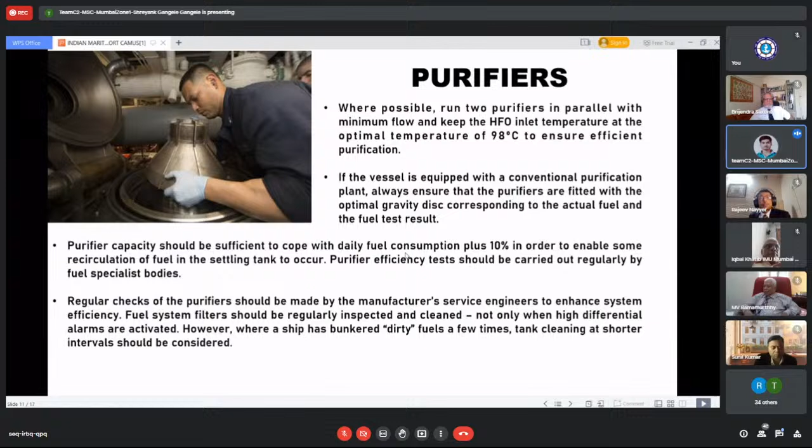Fuel storage, settling, and service tank handling is a crucial part, so I would like to give some precautionary ideas. Avoid mixing by storing newly purchased fuel in an empty tank. Ensure that the vessel has sufficient fuel on board to enable the testing of new bunkers prior to usage.

This must be carried out by following the latest ISO standard of lowest permissible cat fines, up to 60 ppm.

Frequent draining of water and bottom settled sediments from fuel storage, settling, and service tanks should take place. Drain oil from the automatic fuel oil backwash filter should not be reintroduced into the fuel treatment system.

Cleaning settling and service tanks during dry docking is needed in order to deal with any long-term buildup of cat fines and sediment at the bottom of the fuel oil storage tanks.

If fuel oil is stored for a long period, cat fines will settle at the bottom of the tank. In rough weather, these particles will be stirred up, and since they are abrasive, they can damage the container of the storage tanks of the ship.

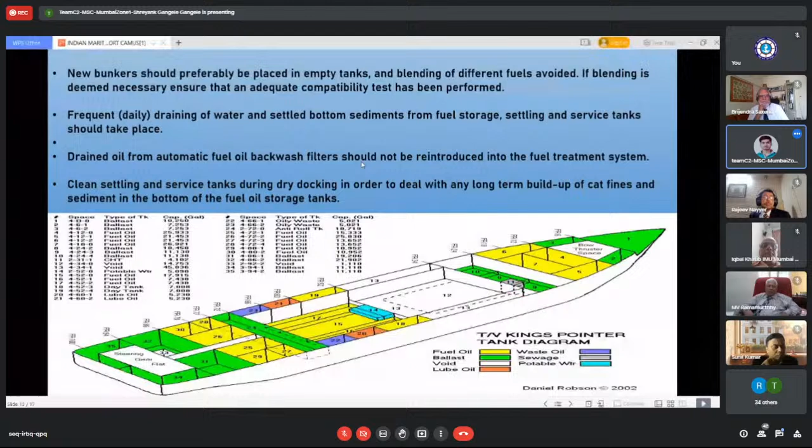Now I would like to pass this on to Cadet Kavya Solanki for further representation.

If we talk about fuel treatment heaters, they should be opened and cleaned regularly to ensure that the optimal temperature of 98 degrees Celsius for purification is reached.

If we talk about purifiers, they should be opened for cleaning at the scheduled interval as recommended by the manufacturers, or whenever contamination is suspected. But to perform this task, one needs spare parts, so the vessel should maintain necessary spare parts on board.

If we talk about training, the vessel should be provided with proper management plans and bunker handling guidance from the company. The personnel responsible should be sufficiently trained to fully and independently perform, operate, and maintain all the maintenance equipment, and that should be ensured by the operator. Personnel should have existing qualifications prior to employment, ongoing training, and market updates wherever needed. Finally, the personnel responsible should be familiar with the issues raised in these recommendations.

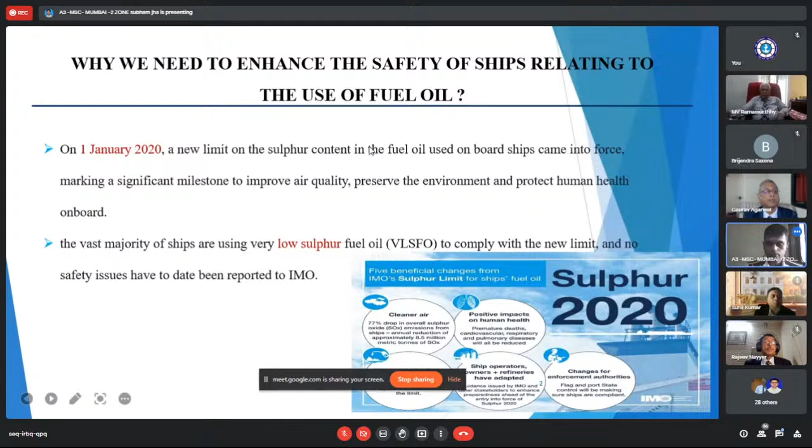And information for the adaptation of alternate marine fuel is about how we can adopt a sustainable fuel, meaning on what basis we can choose a sustainable fuel. So, following the guidelines given by the International Maritime Organization, sulfur emission should be less, and parameters like chemical structure, fuel material, energy comparison, physical state, flashpoint, maintenance issues, and energy security impact should be considered so that the best fuel can be selected for further research and development.

So we have also used these parameters in our research paper, and seeing all the criteria, we propose that ammonia can be a better option as marine fuel compared to HFO or currently available options of marine fuel, for the sustainable development of the environment and also for the safety of human life.

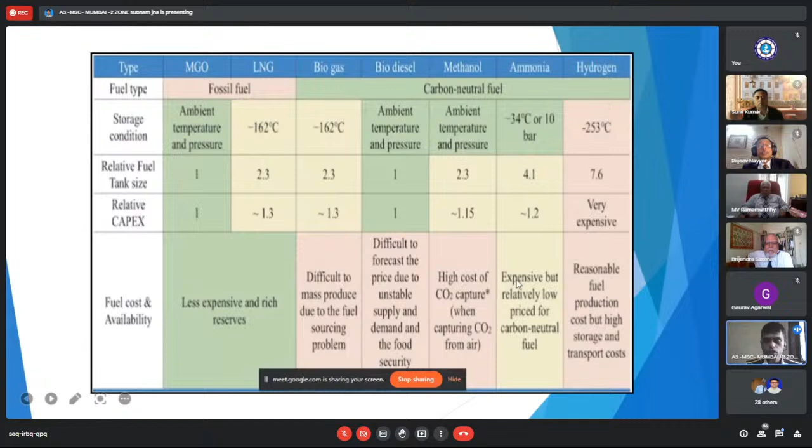It may stop there. Relative fuel tank size: we can see ammonia needs 4.1 and hydrogen 7.6. Relative capital expenditure is very less for ammonia, that's the main point, 1.2 only. And fuel cost and availability: it is expensive but relatively low price for carbon-neutral fuel, though it depends on the country. China is the highest exporter of ammonia, so for them it is cheaper, and for India it is somewhat costly because India is not producing that much ammonia yet.

Ammonia synthesis and ammonia separation is being taken together with unreacted gases, and then ammonia is being produced at last. Our next step is the benefits of ammonia as a marine fuel, how ammonia is beneficial as a sustainable fuel and also for human life and safety.

Zero carbon emission: as there is no carbon atom in the ammonia molecule, it does not emit CO2 during combustion. So it's a very important point, zero carbon emission. Safety of life also matters here.

Energy density: ammonia has an energy density similar to methanol and more favorable than hydrogen. Additionally, it requires less cooling than cryogenic liquid hydrogen.

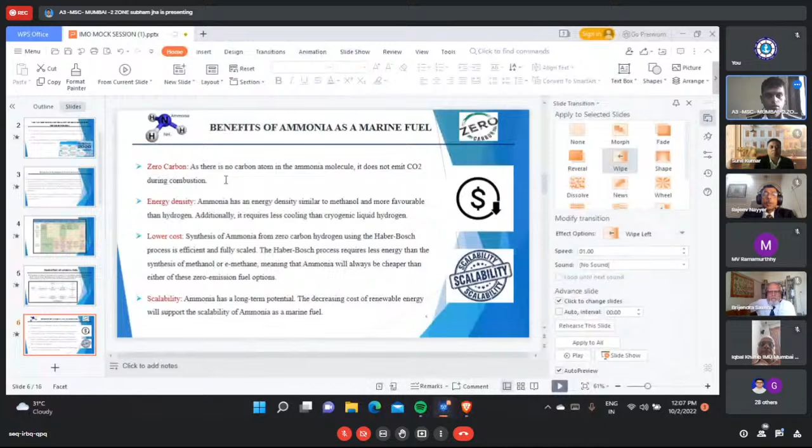Continue going on, if there's some problem we'll come back to you. Yes sir, scalability - ammonia has longer term potential. Decreasing cost of renewable energy will support the scalability of ammonia as marine fuel.

We have more points on this. Ammonia can also hold its own as fuel. In this case, storage of ammonia and transportation of ammonia is also easy, because we have been doing transportation of ammonia. We have 200 gas tankers of which 40 are always active to carry ammonia from one country to another. So we have the experience of storing and transporting, so there is no issue with how we can carry and transport the ammonia.

Ammonia has an auto ignition temperature of 651 degrees Celsius, and the risk of ammonia fire is lower compared to other fuels. Some people see this high auto ignition temperature as a problem. To resolve that, I think we can mix another fuel in there so we can lower the ignition temperature if we want to start the engine at a low temperature. But it has its own auto ignition temperature - it will ignite itself if it exceeds 651 degrees Celsius.

Ammonia has a higher energy density, even compared to liquid hydrogen at 8.5 megajoules, which has to be stored at cryogenic condition. That's the point repeated here - as shown in the chart, minus 253 degrees Celsius is not easy to provide for a fuel, whereas for ammonia, minus 33 degrees Celsius is easy.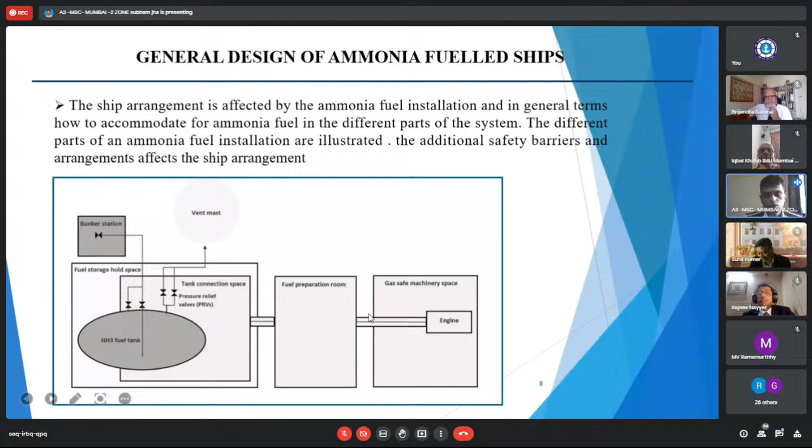And then it is connected with the fuel preparation room. In this fuel preparation room we can also lower the ignition temperature of ammonia, and then it goes to gas safe machinery spaces and the engine.

Now, steps to overcome the challenges of using ammonia as a marine fuel. As our topic is safety of life on board ship, and sustainable development of the environment also matters, we focus more on the safety of life. The focus area is reducing the risk of ammonia leakage during bunkering, and limiting the risk and consequences of exposure to ammonia for personnel involved in bunkering operations.

So what he has to keep in mind - leakage detection with automatic closing of bunker valve can be used. This is a very important mechanism we can use: leakage detection with automatic closing of the bunker valve if there is any emergency. In case of leakage, a water spray system at the bunkering manifold can reduce toxic vapors in the bunkering station.

Moving forward, our second point is to protect the ammonia storage tank from excessive heat input, so that ammonia doesn't react on its own.

It needs exposure to air and any flammable kick to ignite itself. So flammability of ammonia in open air is significantly lower than for methane.

Therefore, relevance of adopting the IGF code requirement for A60 shielding boundaries of superstructures facing fuel tanks on open deck, which is required for methane fuel tanks, should be considered. Here we also have concern for the life of seafarers on board.

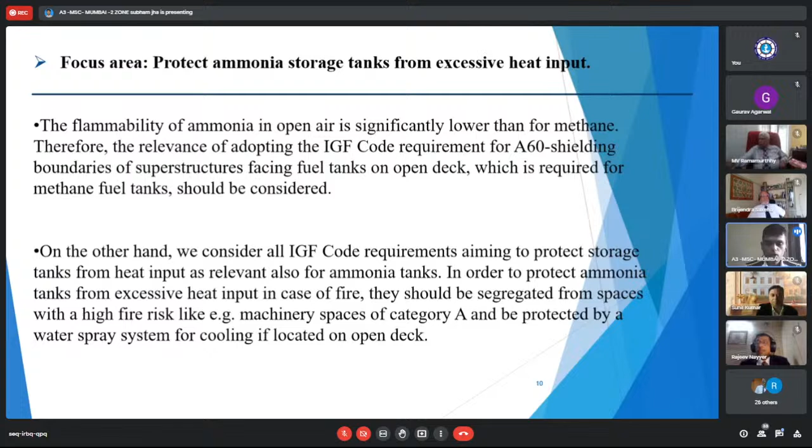Protect ammonia fuel installation from external events that could damage the tank, causing accidental release of ammonia. External things should be kept at a higher distance from this fuel. The collision and grounding requirements defined in the IGF code for LNG tank and piping are considered relevant.

Ammonia tank should preferably be located away from exposure to ship and cargo operations. Alternatively, appropriate mechanical protection should be considered to reduce the risk of leakage in machinery spaces, which could expose personnel to toxic vapor and make machinery spaces inaccessible.

So, for the spaces in the ship, the ammonia fuel system should be arranged with a secondary barrier, as shown in our previous blueprint of how we can make the spaces and tank system when using ammonia fuel. We should have secondary barriers to prevent gas leak from spreading to the engine room. Special care should also be taken to safely isolate equipment and machinery from the fuel system for maintenance purposes.

Manual valves and fuel line purging - I think manual valves should not be suggested. We should use automatic valves, which will reduce any hazardous situation.

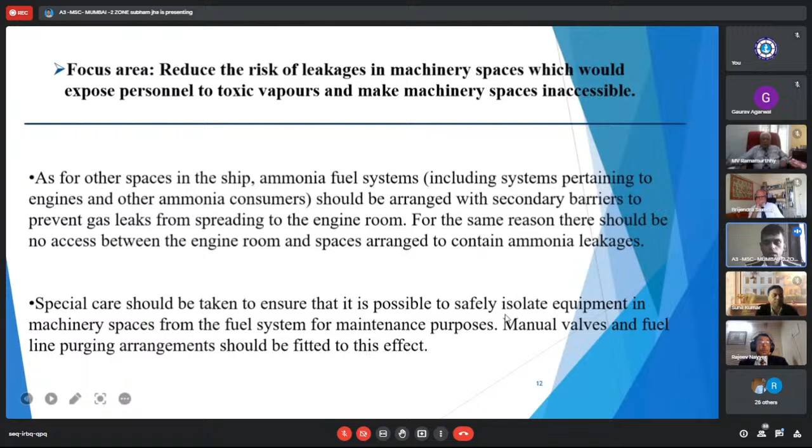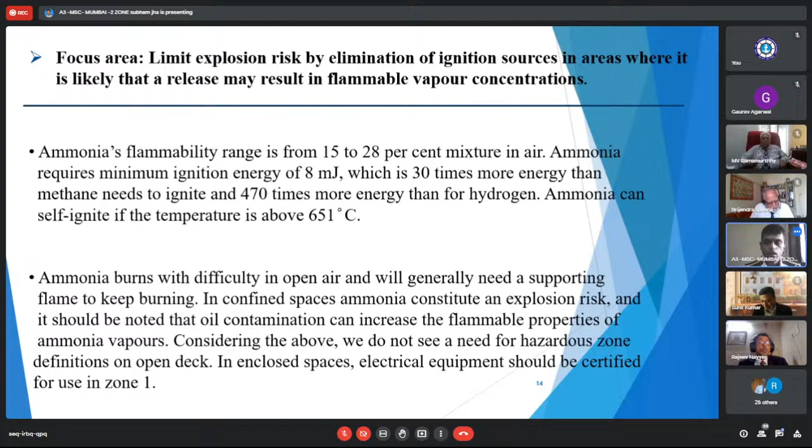So, limit explosion risk by elimination of ignition source in areas where it is likely that release may result in flammable vapor concentration. Same case, sir - we have to look at how much heat is there in ammonia and how it can react with other liquids available in the surroundings.

So coming to our conclusion, we were very strict on the topic of safety of life and using a sustainable fuel for the environment. So we suggest that ammonia can be the future marine fuel, as concerns safety of life and sustainable environmental development. Thank you, sir.

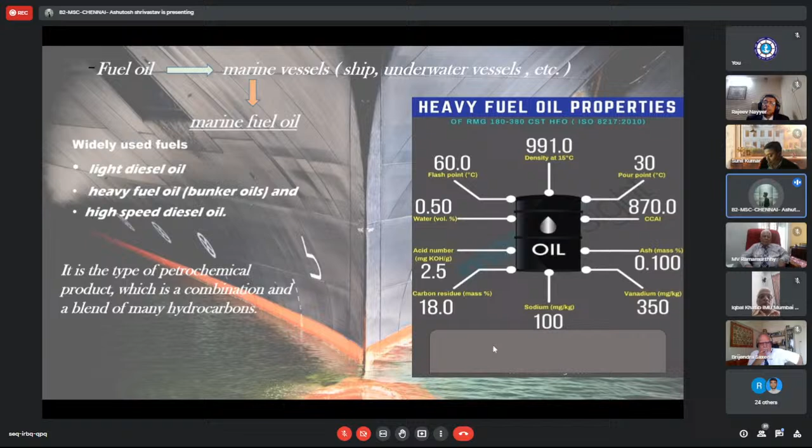Almost all petroleum fuels are obtained by fractionating column from crude oils, and there is a wide variety of fuel oils from which a choice may be made. Fuel oils of higher viscosities are cheaper in cost, but they also have a higher level of impurities which are harmful in diesel engine operation and component life. Fuel quality has a major influence on installation cost, the necessity to have purifying equipment, and maintenance due to higher wear and other effects on engine components caused by impurities.

During the production of marine fuel oil, a number of chemical reactions take place. To make these chemical reactions more feasible, or to increase the rate of the chemical reactions, we use substances known as catalysts. So catalyst is one of the most prominent and beneficial components in the large scale production of marine fuel oil.

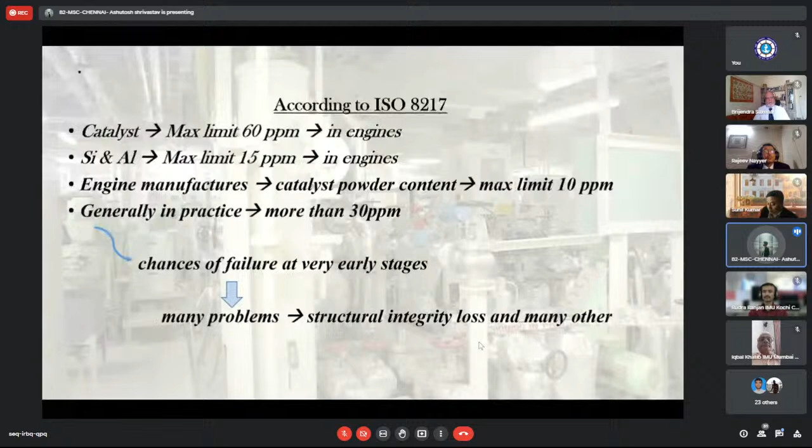According to ISO 8217, there is a requirement of a maximum limit of 60 ppm of catalyst powder in the fuel oil while entering the engines, with a limit on silicon and aluminium combined not exceeding 15 ppm. But mainstream engine manufacturers nowadays suggest that catalyst powder content should not be more than 10 ppm at the engine inlet. However, it has generally been noticed that the average quantity present in marine fuel oil is usually more than 30 ppm, which undoubtedly increases the chances of early engine failure.

The catalysts used for producing marine fuel oil are one of the biggest contributors to its production, but they also contain amorphous aluminum silicate or zeolite molecular sieve microsphere, which contains aluminum oxide, silicon dioxide, and other harmful chemicals. When the catalyst particles gain hardness and become denser, they can cause blocking of pipes and nozzles, and can severely damage marine vessel engines.

Also, as per the new IMO rule, sulfur quantity is capped at only 0.5% mass by mass on seagoing vessels, although ships with exhaust filters are excluded from this category for now. There is no prohibition on transporting high sulfur marine fuel, but it can't be used in the fuel tank unless the vessel has an exhaust filter.

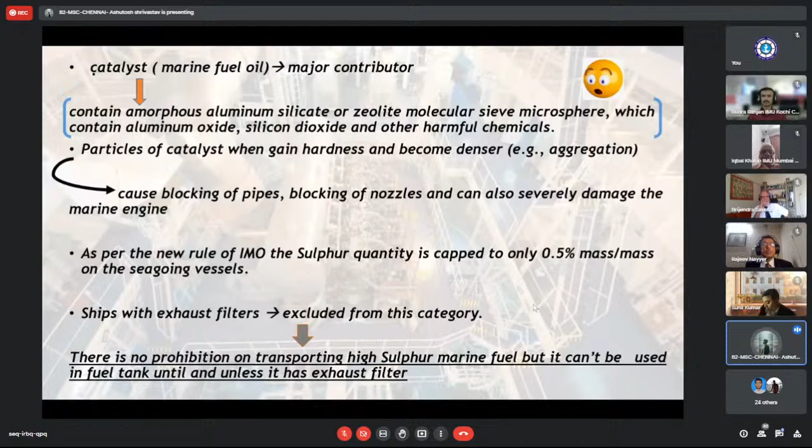Good afternoon, everyone. I am Shobit Kumar, here to raise some concerns associated with the information given by Harshit. When these new blended fuels are stored for a long period of time, sludge formation takes place as a result of the precipitation of asphaltene out of solution. This sludge has the capability to block filters, nozzles, pipes, and fittings, thus harming the engine of marine vessels.

Also, once asphaltene precipitates out of the fuel, there is no way to mix it back into the fuel components. In low temperature conditions, major operational problems may arise due to the higher paraffinic nature and potential for wax formation at lower temperatures. New blended products with a high distillate percentage could be susceptible to this.

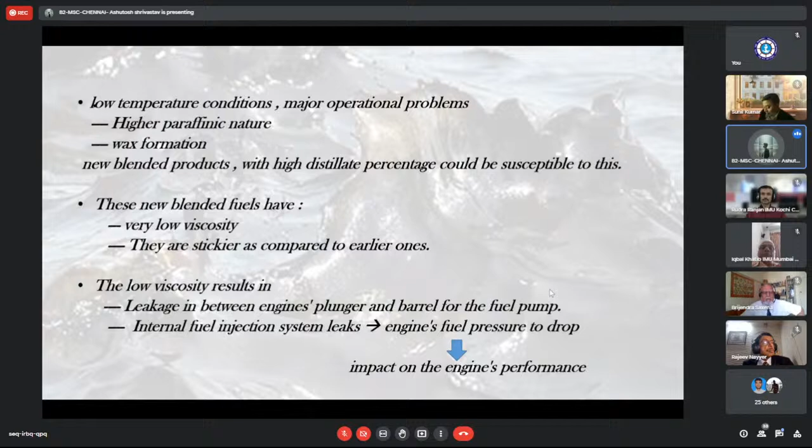These new blended fuels have a very low viscosity and are stickier compared to earlier ones. The low viscosity results in leakage between the engine's plunger and barrel for the fuel pump. Moreover, when the internal fuel injection system leaks, it could cause the engine's fuel pressure to drop, which could impact the engine's performance.

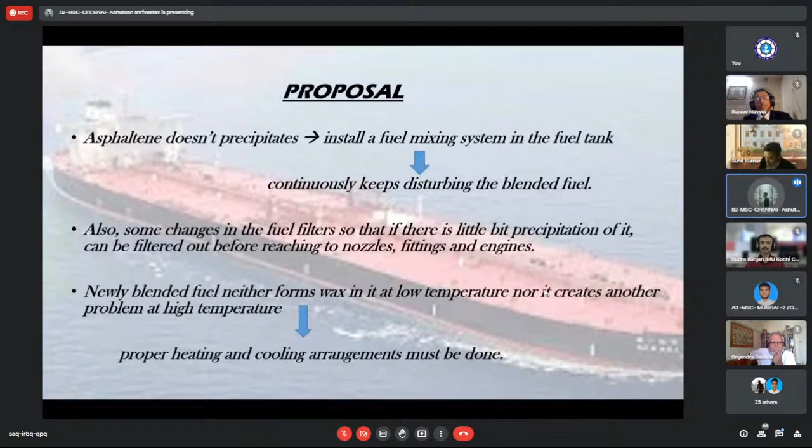Also, we can make changes in fuel filters so that if a little precipitation of asphaltene does take place, it can be filtered out before reaching the nozzles, fittings, and engine. To ensure that newly blended fuel neither forms wax at low temperature nor creates any other problem at high temperature, we can work on proper insulation arrangements with temperature control, while taking care of the flash point of the blended fuel so that fire accident risks can be avoided.

To ensure there is no pressure drop between the engine's plunger and barrel for the fuel pump, we can upgrade and change the nozzles, fittings, and gaskets according to the new viscosity of the fuel. And for tackling the sticky nature of the fuel, we can work with engine oil manufacturers and upgrade the engine oil according to the blended fuel requirements. Thank you, sir, this is all.

Thank you very much, Chennai B2. Before I open the floor, I just wanted a clarification on the term exhaust filter. What exactly are you trying to talk about? Are you talking about the scrubber mechanism to control the SOx emission?

Yes, sir, I am talking about the scrubber mechanism only. Request you to kindly use terminology consistent with IMO terminology so as to avoid any confusion. I now open the floor for other member states to have their comments.

I have Chennai C1. Chennai C1, you can take the floor. Thank you, sir, Chairperson, for consideration. We appreciate the presentation put forward by the delegates of B2.

We like the idea mentioned about the asphaltene precipitation being avoided by using a mixing system in the fuel oil tank that continuously keeps disturbing the blended fuel. We would like to add to this: consider an enhanced temperature control unit within the mixing system in order to avoid a rise in vapor pressure inside the tanks, which can lead to disasters on the ship. I would also like to know about any intrinsic or extrinsic safety mechanism for this in order to avoid fire hazards within the tanks.

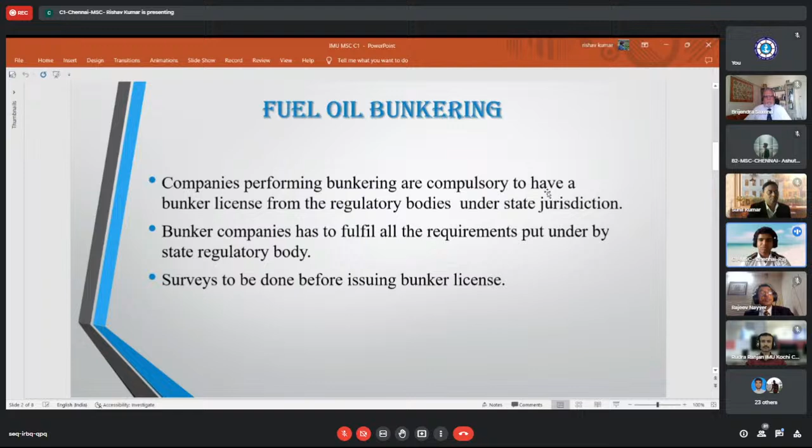The development of mandatory requirements regarding the reporting of confirmed cases where oil fuel suppliers have failed to meet the requirements of the organization, taking into account that feedback should also be provided to the suppliers.

Member states were encouraged to form a regulatory body to look into the bunker licensing scheme and surveys. A member state who wishes to implement a bunker licensing scheme may modify and use templates as per their national law. States can also consider specifying additional requirements for suppliers working under their jurisdiction.

The development of mandatory requirements to ensure contracting governments take action as appropriate against oil fuel suppliers in confirmed cases of deliveries of oil fuel that does not comply with the specified requirements.

With the deadline of the IMO Sulfur Cap 2020 drawing closer, understanding the owner's concern to remain operational while complying with environmental regulation, having a good implementation fuel oil changeover plan is just the beginning of the transition phase. A very important aspect of the plan is to address the potential risks that may arise.

Mandatory requirements regarding the documentation of the actual fuel batch when bunkering, providing a statement that the fuel oil delivered complies with regulations. The development of guidelines for ships to address situations where they have indicated results suggesting that the oil fuel supplied may not comply with regulation.